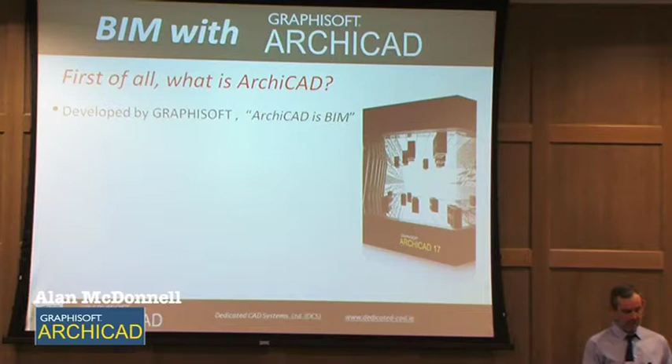I'm going to hone in on this particular point a lot through the slides. It's the flagship package from Graphisoft. Archicad Solo is a slightly different version. It's almost a light version of Archicad, geared towards smaller offices. As well as being available on Windows and Mac, the key point at the bottom of this slide, it's Graphisoft's main software package, purely for architecture.

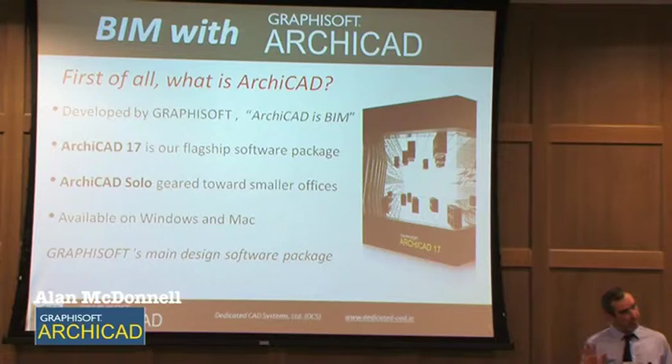It's not a structural package. That's Graphisoft's focus. They haven't diversified out into structural or infrastructure. It's their package. That's a conscious decision on their part. They haven't developed a suite of software. I'll come back to that point in a few minutes. So just to make that point from the outset, so that it ties in later on a few more slides.

So how is Archicad used in Ireland? Well, we can go from the ridiculous to the sublime. We have sole practitioners up to large multi-user teams. Also the scale of projects, we can go from my new extension that I'm hoping to get next year versus commercial or industrial fit-outs. I'm going to name drop. Somebody asked me recently, is Archicad only for domestic projects? No. A lot of the new Tesco retail complexes that you'll see around Ireland in various locations would have all been designed in Dun Laoghaire by one of our clients. So Archicad is commercial as well as domestic.

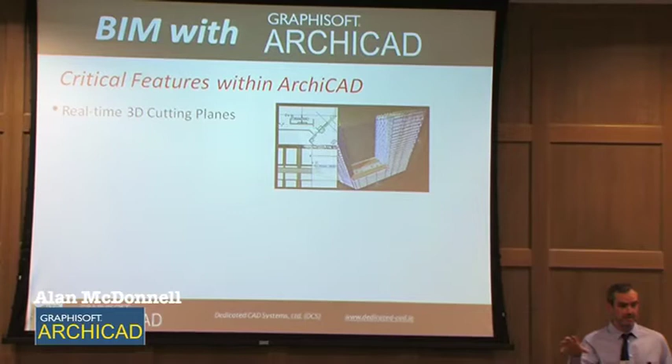Some critical features within Archicad, a brand new one which a lot of people have seen in other software such as SketchUp. We love SketchUp. It doesn't have Google anymore, but that's neither here nor there. The real-time cutting planes, I know other softwares have it as well, but again, brought to my attention by a client. We're talking about clash detection and programming. Sometimes the easiest way to find clash detection issues is when you're actually looking at the model, rather than the software doing it for you. There's a lot of things that can be missed by the software, like the extraction of machinery, etc., that wouldn't necessarily be caught by clash detection, so it was great that we heard that.

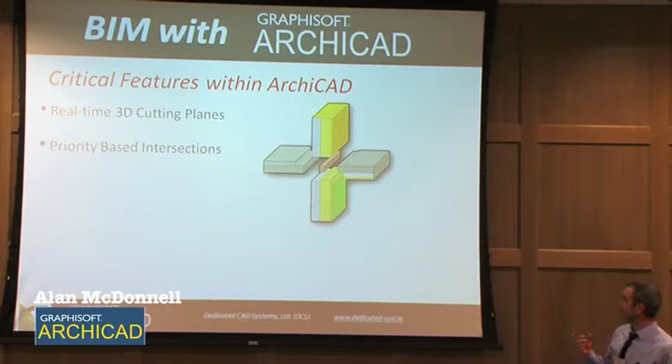Priority-based intersections, which is another in thing in Archicad. It's brand new in Archicad 17. It also helps the model develop. I don't know if you can see some of the composites are self-intersecting. I'm not sure if other BIM packages have that as well, but we are very impressed that we have it now anyway. This next bullet point is actually 2 bullet points at the same time.

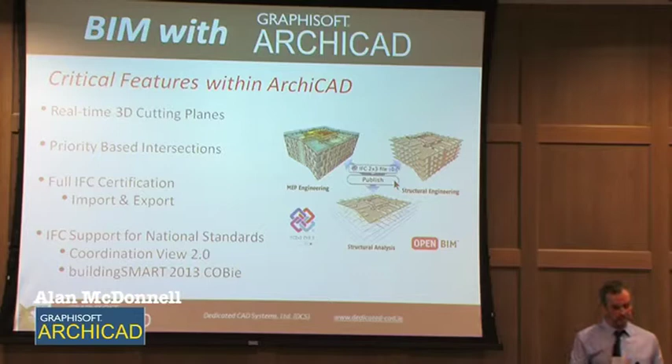IFC certification, there was a question raised earlier on about interoperability, which I was happy to hear as well. In March, a number of the vendors were all certified by buildingSMART, who are the organization who develop IFCs. Archicad 17 has full import and export capability for IFC. When we see BIM now, IFC is almost hand in hand with that to try and keep it neutral, as you had referred to earlier on. Coordination View 2.0 and buildingSMART 2013 COBie, they're fully embedded into Archicad 17. So again, we're talking about interoperability. I'll come back to my previous point that I made on the first slide in 1 second.

Collaboration. Archicad is Graphisoft's main software package. That's it. Okay, it's kind of unusual. It puts us in a unique position where other vendors who are here with us, different software houses, have a suite of software for different fields. I know the Autodesk guys have a fantastic suite of software. I know I can talk about competitors. I'm allowed. Martin, who isn't here, he would let me, but he's not here, so I'm allowed to do what I want. So what would an Archicad user do to collaborate?

Because Archicad is purely an architectural design software, what would an Archicad user do to collaborate if we want to do clash detection? Because we're going to be dealing with a structural person who's using software that may not be Archicad, or we're dealing with an MEP consultant who is not using Archicad because Archicad is purely for design. What would we do? Now, I could substitute in another phrase. I'm not going to take a phrase from another vendor. That would be overstepping the mark a little bit. What will we do?

Graphisoft developed Archicad for architectural design as part of the Open BIM initiative, which is driven by buildingSMART. Graphisoft encourages and facilitates this collaboration with other software, what we would call best-in-class design and management software, through the use of IFC. For example, Tekla, a completely different company under a completely different umbrella organization. They would be taken by Trimble, whereas Graphisoft would be owned by Nemetschek, two high-level umbrella organizations. They would promote the communication between the two.

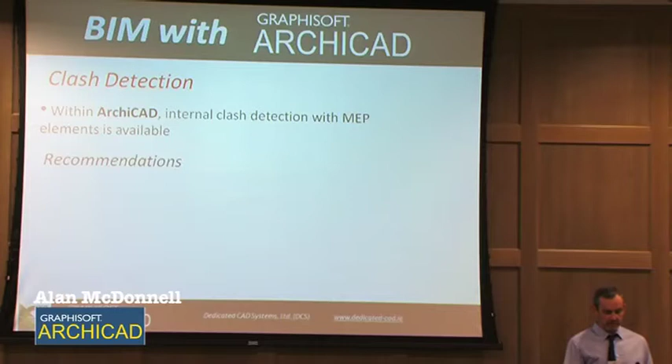But if I wanted to go out and recommend further, this is where John has already named some of my pieces of software. Tekla BIMsight. Again, ironic that Graphisoft would recommend a competitor's software. It's on the Graphisoft website. Tekla BIMsight, free commercial license. People say there's no such thing as a free dinner, but it is free software, and it does work. It has its restrictions, and there is other software that does lots more, but as a grounding point for clash detection between IFC models being collaborated from different locations, why not?

Again, Solibri Model Checker. This is a paid piece of software. So a big difference, and depending on the scale of the project, price dictates whether we're going to use it or not. For a multiple-participant design team, the cost could be spread out, and for large companies, how many times are we going to use Solibri? That would justify actually paying the license cost.

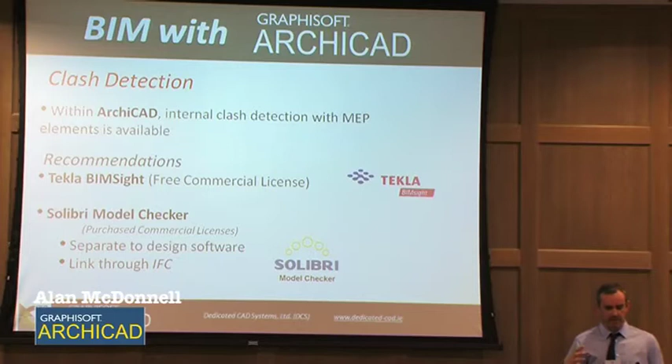There is another very important one as well, which we'll see in maybe about 8 minutes from another vendor. I know Navisworks is there, and it's very big, but you're going to hear about Navisworks from somebody else. Link through IFC, that's the core piece of information. If we're taking data from different software, this whole IFC trend is hopefully going to tie in and allow us to be platform independent.

Construction simulation. Archicad has its own construction simulation add-on, which we download for free and install in Archicad, and it gives us a run-through of our building. We can take different elements and assign a start date and completion date, similar to Tekla Animator, which is again software from a different vendor. It gives the output of the building in an animation format. It doesn't give out Gantt charts, but that's not what it was designed for. It's designed purely for visuals.

Recommendations if I went to an external vendor: Synchro. Synchro updated their IFC translator maybe 2 months ago, which had a pronounced effect on the capability of combining data between different modeling software. Vico, which is another ironic piece of software, doesn't have a huge penetration in Ireland, I don't know about the UK. It started off with Graphisoft, went to Autodesk, and now it's with Trimble. For some strange reason it's done a merry-go-round via all the vendors, and I don't know who it's going to end up with next. But we're talking high-level 4D and 5D solutions there. Their link is native interpretation, but also through their own IFC translation.

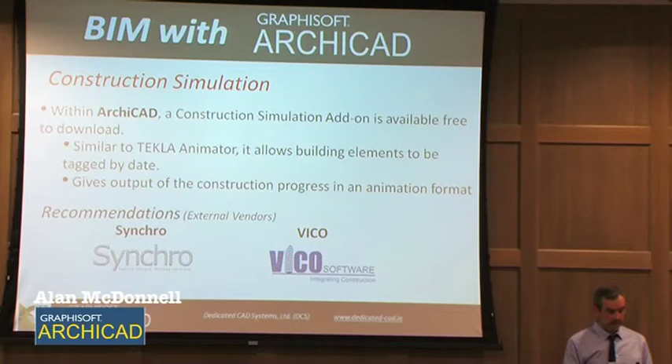Again, I'm name dropping a little bit here. A case study, the National Advanced Manufacturing Research Centre in the UK. It's not a nuclear facility, it's just a manufacturing plant. Designed by Bond Bryan, who would be one of the bigger users of Archicad in the UK, consulting with Buro Happold structural engineers, who are using Autodesk Revit Structure. A very classic case, something we come across all the time. We have an Archicad model, we have a Revit Structure or a Revit MEP model.

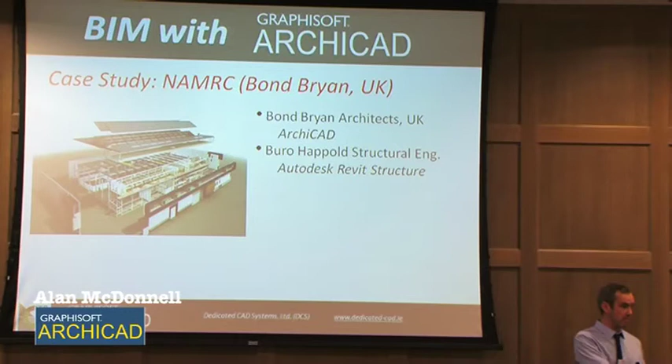How do they communicate? They have a BREEAM certified building with an outstanding rating, and by their own admission, not me putting words in their mouth, clash detection was via Tekla BIMsight and Solibri. That's how they would do it. Competing software, how do we tie it all in? IFC, and then we can cherry pick whichever solution we want because of that interoperability. This goes back to my original phrase: Archicad is for design. It doesn't have the whole suite of tools I need, so one would need to talk between them. Can't believe it's 10 minutes already.

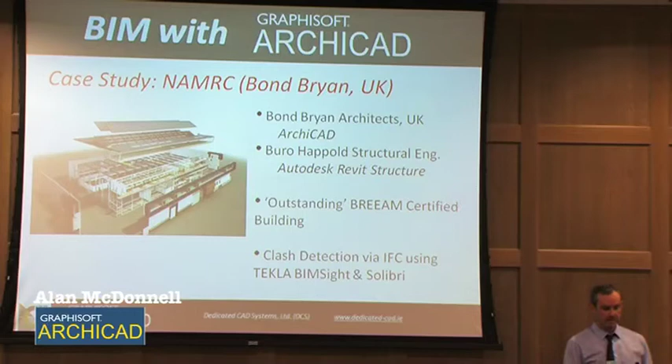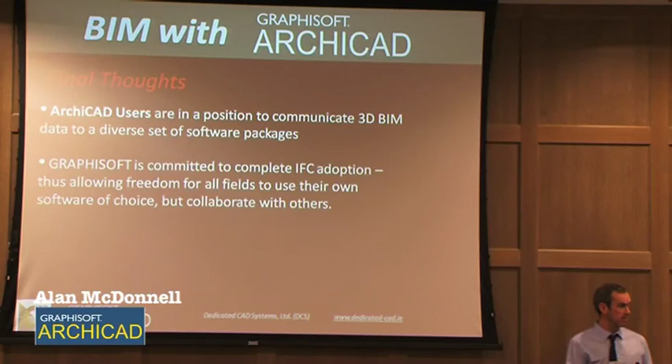Some final thoughts. Archicad users are in a position to communicate 3D BIM data to a diverse set of software packages. That's a given. Because of where Archicad situates itself, it needs to be able to communicate. But Graphisoft is also committed to IFC adoption. It's linked to everybody else. That's why we're putting so much emphasis on IFC adoption, because unless Archicad comes out next year and says it's going to develop a complete MEP suite and a complete structural suite, which they're not, this is how we communicate. Thanks for your time.

I've done 11 minutes.